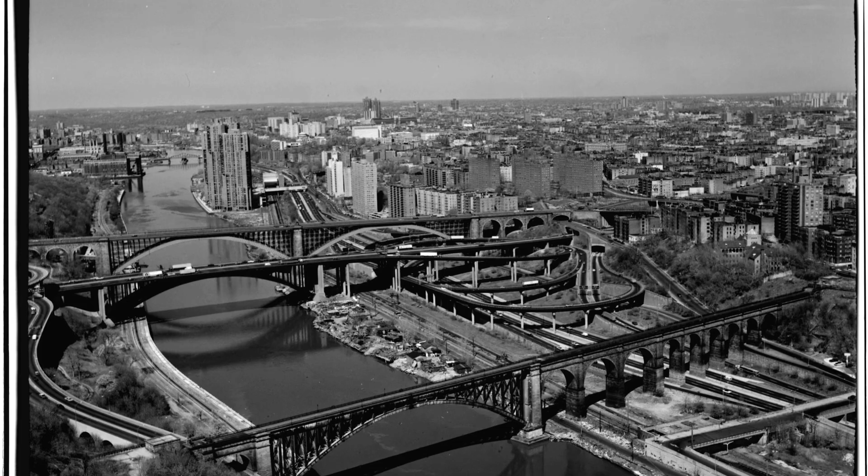There is a place where two states reach toward each other across a great river, where the ancient cliffs of New Jersey face the rocky heights of Manhattan, where the Hudson, wide, deep, tidal, and indifferent to human ambition, has flowed for 10,000 years. And there, suspended above it all, on four massive cables, woven from more than 100,000 individual wires, hangs one of the most extraordinary structures human hands have ever made.

The George Washington Bridge carries more vehicles than any other bridge on Earth, more than 104 million in a single year. On an average day, nearly 300,000 cars, trucks, and buses make the crossing. It stretches 4,760 feet across the Hudson River. Its main span alone, the distance between the two towers, is 3,500 feet.

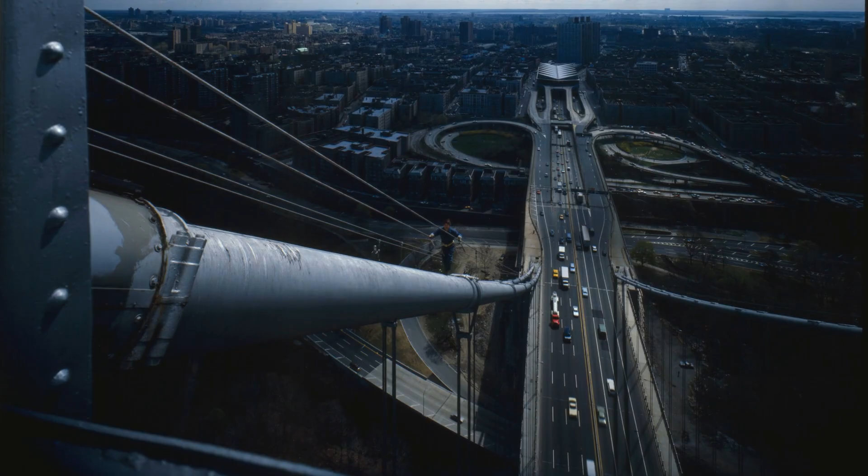When it opened in 1931, that span was nearly double the length of any suspension bridge that had ever been built. It has 14 lanes of traffic spread across two decks, and it stands today much as it did on the morning it first opened, a testament to ambition, to engineering genius, and to one man's absolute refusal to accept the impossible.

By the early 20th century, the American city was changing at a pace that had no historical precedent. The automobile was everywhere. Millions of people were pouring into New York from every corner of the world. The metropolitan region groaned under the weight of its own growth. Factories needed freight, workers needed passage, commerce demanded speed.

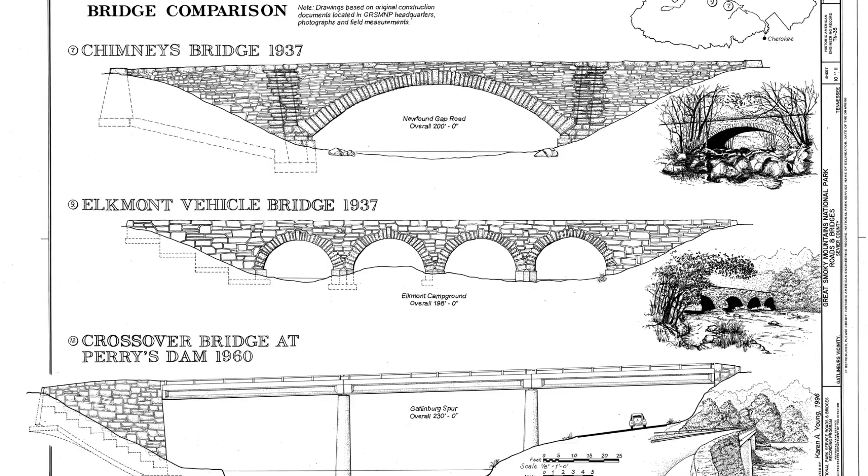And yet the Hudson River, that magnificent 200-mile-long barrier between New Jersey and Manhattan, had no fixed crossing for automobiles. None. Ferries carried the traffic. Slow, seasonal, weather-dependent ferries that were wholly inadequate for a modern industrial nation on the move. Something had to be done.

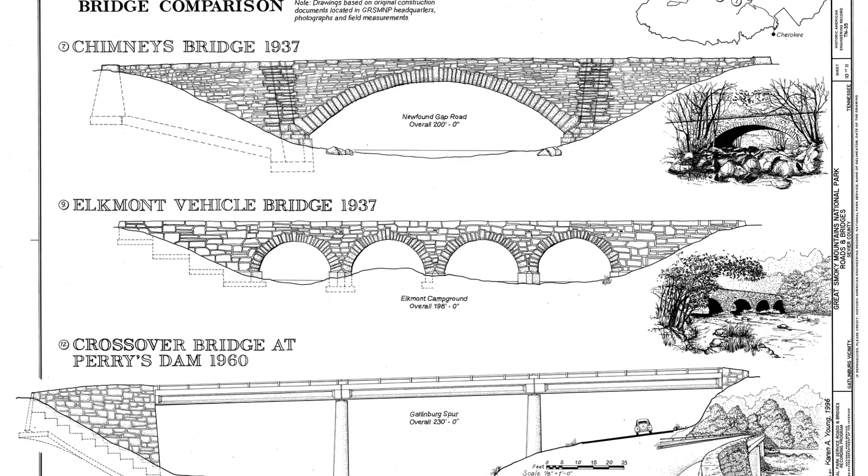The idea of a bridge had floated around engineering circles since as early as 1906, rising alongside early conversations about what would become the Holland Tunnel. But for nearly 2 decades, proposals rose and fell like the river tides, competing visions, competing politics, competing egos.

Engineer Gustav Lindenthal had championed a massive crossing near 57th Street in Midtown Manhattan, a bridge that would have carried 16 railroad tracks and 12 lanes of automotive traffic, topped by a tower that would have been the tallest building in the world. It was breathtaking. It was also impractical. The Army Corps of Engineers would not grant permits. Manhattan real estate developers and city planners pushed back hard. The proposal collapsed under its own ambition.

It was not until 1925 that the legislatures of both New York and New Jersey finally voted to allow serious planning to begin. And it was not until a quiet, precise, Swiss-born engineer named Othmar Ammann stepped forward that the dream found its true architect. Ammann had spent years working under Lindenthal, learning, absorbing, quietly disagreeing. He saw what his mentor could not.

He saw that a bridge between Fort Lee, New Jersey, and Washington Heights in Upper Manhattan was not merely possible, it was inevitable. The geography was almost perfect. On both sides of the river, the land rose in dramatic cliffs, the Palisades to the west, the rocky heights of Fort Washington to the east, meaning the bridge could achieve the necessary height above the river without requiring lengthy approach ramps built from the ground up. Maritime traffic could pass freely beneath. The footprint on each shore could be contained.

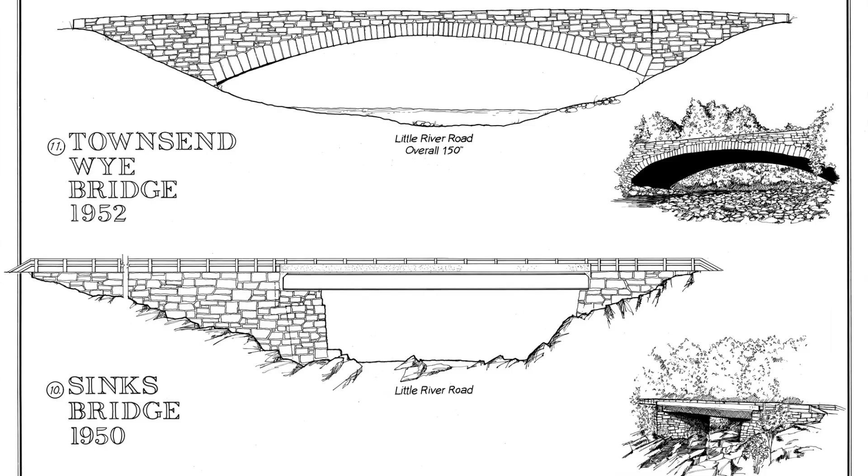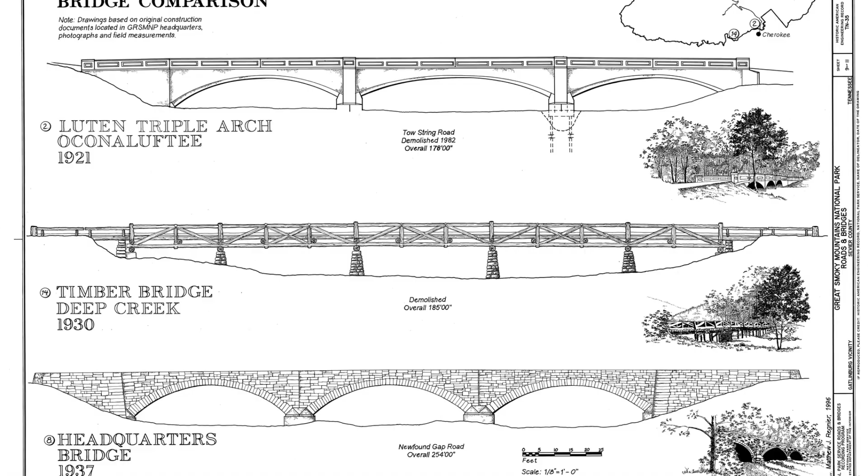Ammann made his case directly to both governors. He won them over. New Jersey's Governor Silzer and New York's Governor Alfred E. Smith both gave their support by mid-1923. And in September of 1927, ground was broken on both sides of the river simultaneously, in ceremonies that marked the beginning of one of the most complex construction projects the modern world had yet attempted.

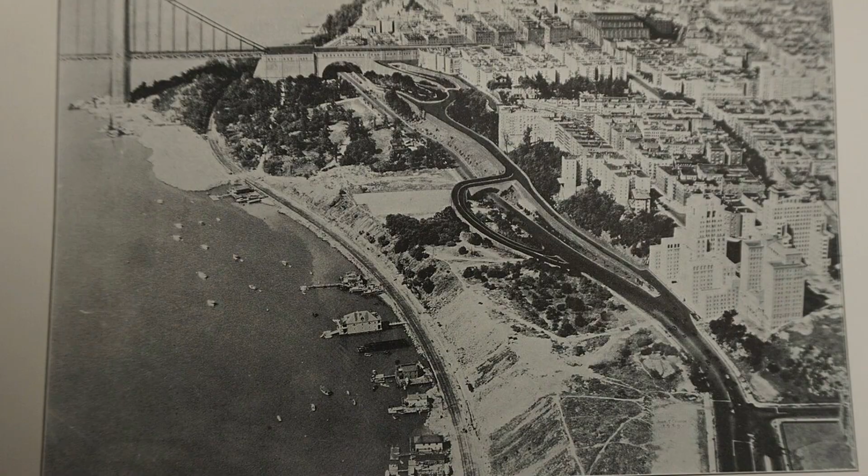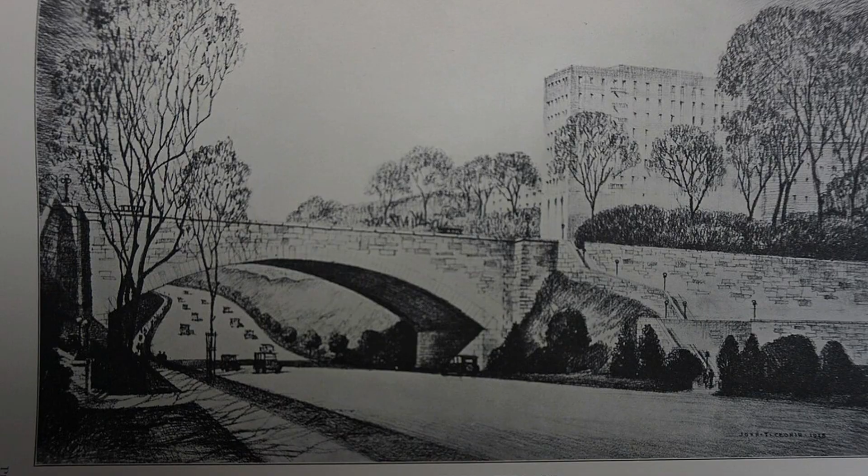The challenges before Ammann and his team were staggering in their scope. The Hudson at this location is not merely wide, it is deep, cold, and driven by powerful tidal currents. The river bottom had to be dredged to allow large ships to pass beneath the finished bridge. Massive cofferdams, watertight steel enclosures sunk into the riverbed, had to be constructed so that workers could pour the tower foundations below the waterline in something resembling dry conditions. These were the largest cofferdams ever built at the time.

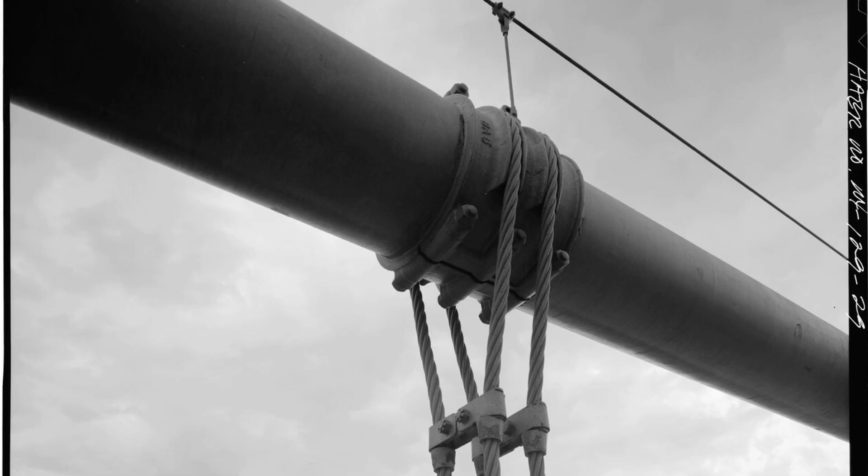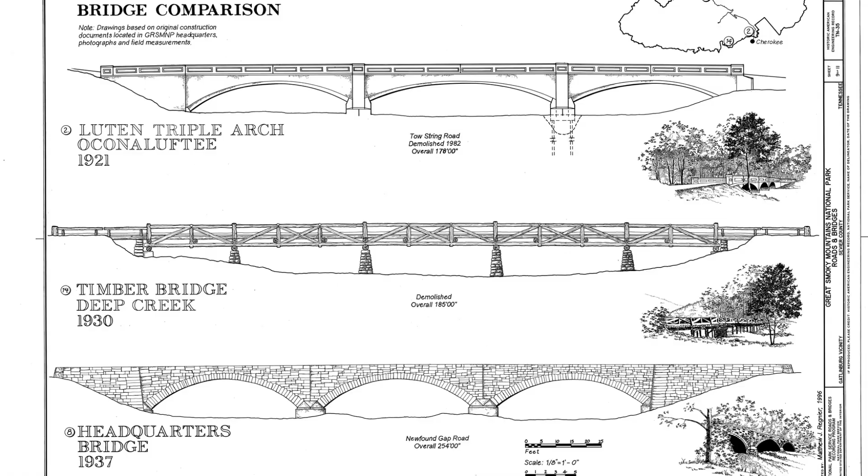The work was brutal, dangerous, and unforgiving. 3 workers drowned when one cofferdam flooded in December of 1927. A 4th was killed by a blast at the New Jersey anchorage. In all, 12 or 13 men lost their lives during construction, a number that, by the brutal standards of that era, was considered remarkably low for a project of this scale. On the New Jersey side, workers had to blast 225,000 cubic yards of solid rock from the face of the Palisades simply to carve out the approach road.

Then the cables had to be made. 4 main cables, each 3 feet in diameter, each containing 61 strands of wire rope. Each strand itself composed of 434 individual wires. In total, 105,986 wires were spun into those 4 cables. Stretched end to end, that wire would reach 106,000 miles, enough to circle the Earth more than 4 times.

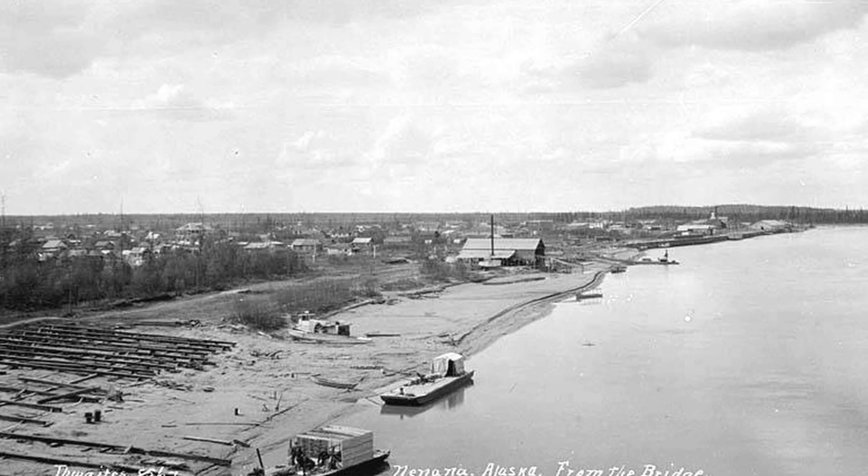Teams of 350 men worked in shifts, spinning the wires on-site from reels held at a dock near the base of the New York anchorage. Each reel carried 30 miles of wire. The spinning of all 4 main cables took 10 full months.

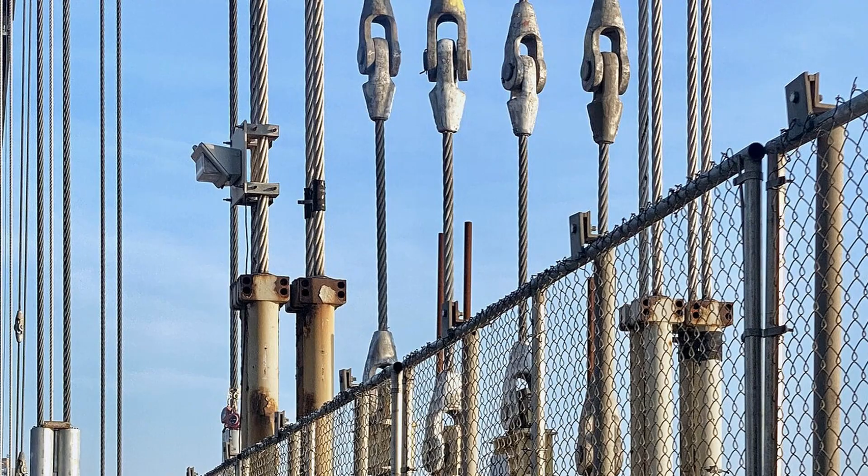And then there was the question of the towers. Each one rises 604 feet above the river, taller than most skyscrapers of the day. They are assembled from steel sections, weighing between 37 and 40 tons apiece, held together by a combined total of nearly 500,000 rivets.

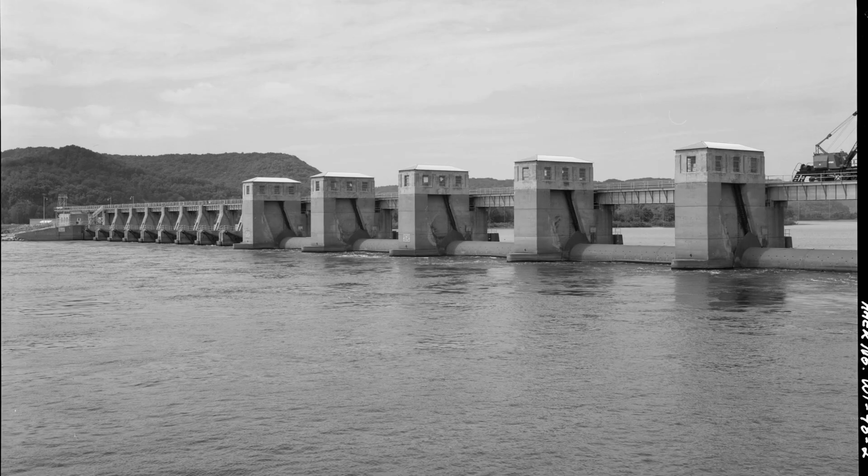The original plan, drawn up with consulting architect Cass Gilbert, called for those towers to be encased in a grand decorative skin of granite and concrete, a soaring Gothic revival statement in the tradition of the Brooklyn Bridge. Elevators would carry tourists to observation decks and restaurants at the top of each tower. It would have been spectacular.

Then the Great Depression arrived in October of 1929. With devastating speed, it stripped away everything that could be cut. The stone facades were postponed indefinitely. The observation decks were abandoned. The ornamental flourishes planned for the cable anchorages, wings, fins, statues, vanished from the blueprints. The bare steel was left as it was.

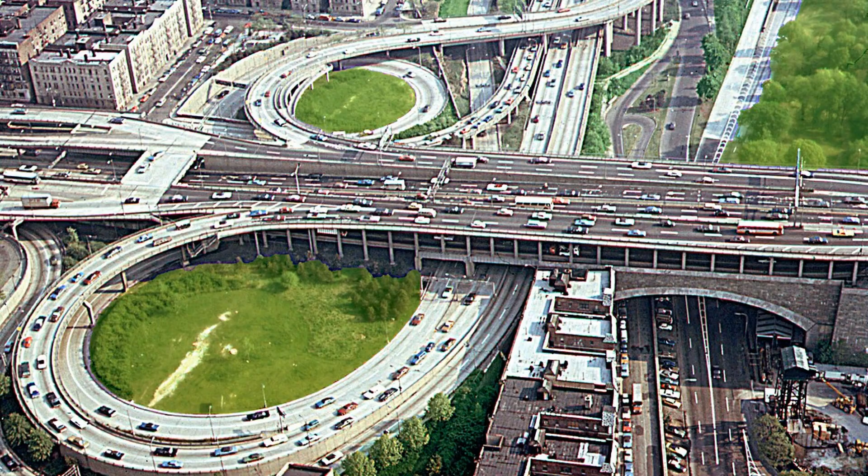What happened next surprised nearly everyone. The public loved it. Critics and architects who had feared the towers would be ugly found themselves moved instead. The great Swiss-French modernist Le Corbusier, standing before those open lattice towers, declared with something approaching wonder that here, finally, steel architecture seemed to laugh.

The exposed framework, its crisscrossed bracing, its raw industrial honesty, its refusal to hide what it was, became the bridge's most recognizable and beloved feature. Othmar Ammann, for his part, never used masonry towers in any of his bridge designs again.

There was also a profound engineering insight embedded in the bridge's deck design. Most long suspension bridges of the era relied on heavy stiffening trusses along their sides, structures as thick as an 11-story building, weighing 13,000 pounds per square foot or more.

Ammann rejected this approach entirely, working from a principle called the deflection theory, the idea that the sheer weight of a long deck provides its own resistance to movement. He designed a deck just 12 feet thick, with a weight of only 1,100 pounds per square foot. A system of plate girders underneath provided the necessary stiffness. It was an act of engineering faith, and it was vindicated completely.

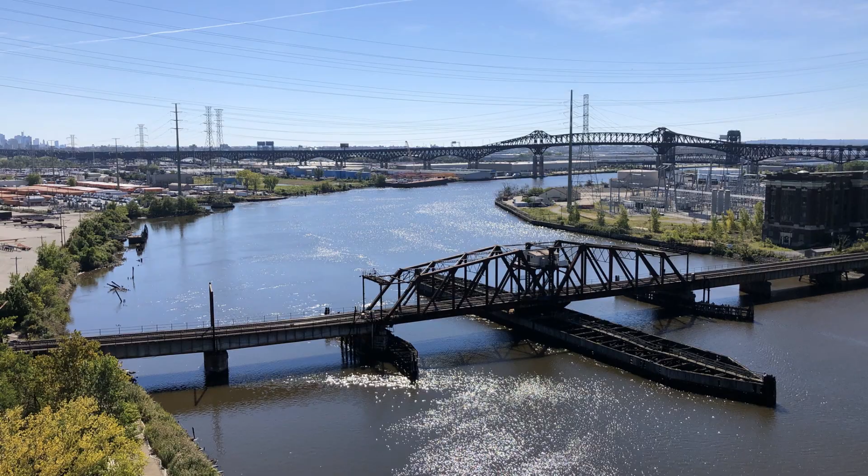On October 24, 1931, the bridge was dedicated in a ceremony attended by 30,000 people, including the governor of New York, a man named Franklin Delano Roosevelt. The next morning, the first souls to cross were reportedly 2 children on roller skates, gliding out from the New York side into the open air above the Hudson. By the end of that first day, more than 56,000 automobiles had made the crossing. 100,000 pedestrians walked its length.

The impact on the surrounding region was immediate and profound. Real estate values in Bergen County climbed almost overnight. Farmland became suburbs. The trucking industry along the East Coast was fundamentally transformed. What the railroad had once dominated, the long-haul truck now challenged, and the bridge made that possible.

In 1962, the lower deck that Ammann had always envisioned finally opened, bringing the bridge to its full 14 lanes. Today, Interstate 95, the great spine of the American Eastern Seaboard, crosses the Hudson River on its cables.

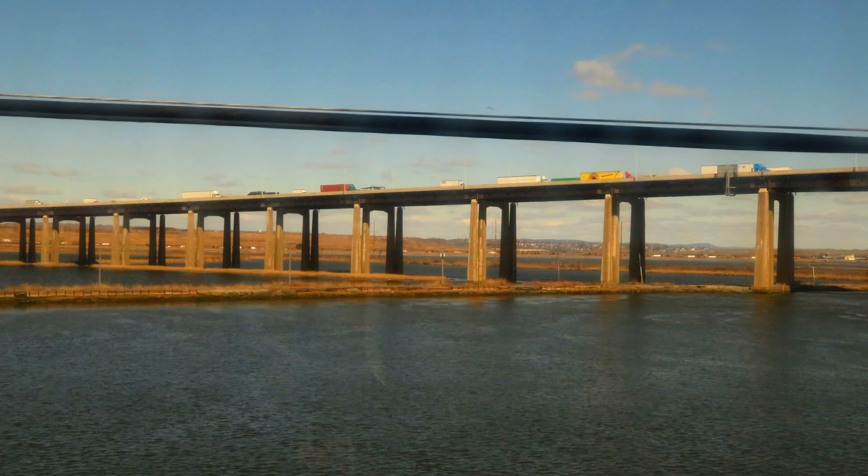And on national holidays, something else crosses above that river. Hung inside the arch of the New Jersey Tower, a flag 90 feet long, 60 feet wide, and weighing 450 pounds, the world's largest free-flying American flag, is raised above the water. Since 2006, it flies also on September 11th, in honor of those lost that terrible morning not far away.

What Ammann built was more than a bridge. It was proof. Proof that longer suspension spans were both physically and economically possible, a fact the engineering world had doubted until the moment it stood before them. Proof that exposed steel could possess beauty.

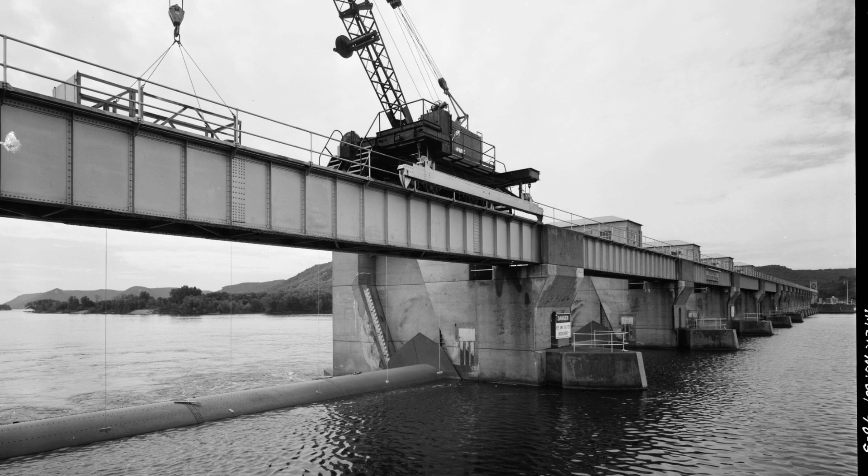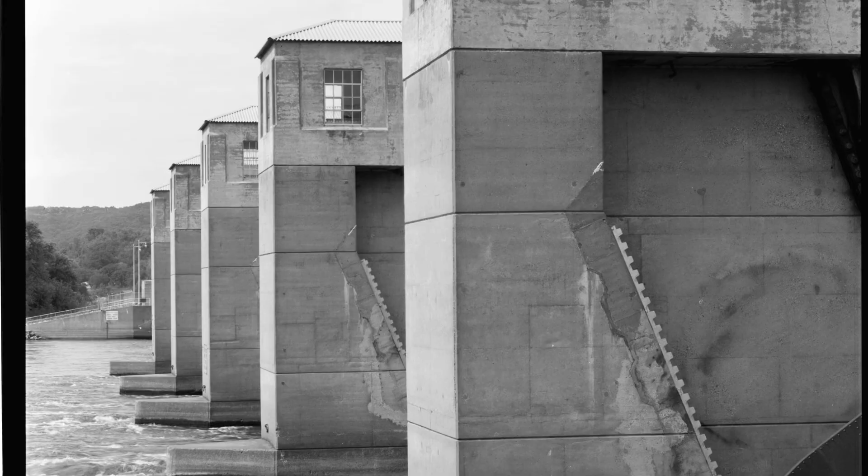Proof that a single human vision, pursued with patience and rigor through years of political obstruction, financial crisis, and physical danger, could permanently reshape a region and an entire industry. The Hudson still flows below, the cables still hold, and every hour of every day the George Washington Bridge does what it has always done, connecting, carrying, enduring.